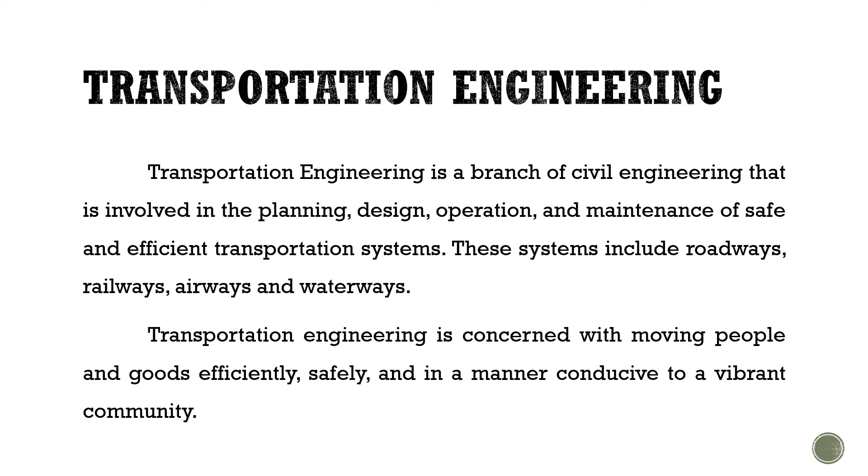Transportation engineering is also concerned with moving people and goods efficiently, safely, and in a manner conducive to a vibrant community. The importance of transportation in a country is comparable to the veins in the human body. Veins help the health of the human, and similarly, transportation keeps the health of a nation in good condition. Transportation also plays an important role in the economic, social, and commercial development of the country.

In order to properly execute things in the field of transportation engineering, we need an expert, called a transportation engineer. There are a lot of roles and responsibilities of a transportation engineer, but let me give you some. First, they could develop efficient transportation systems. They could also review the effect of urban development on traffic systems, and simulate traffic in an intersection to make sure the traffic movement is smooth.

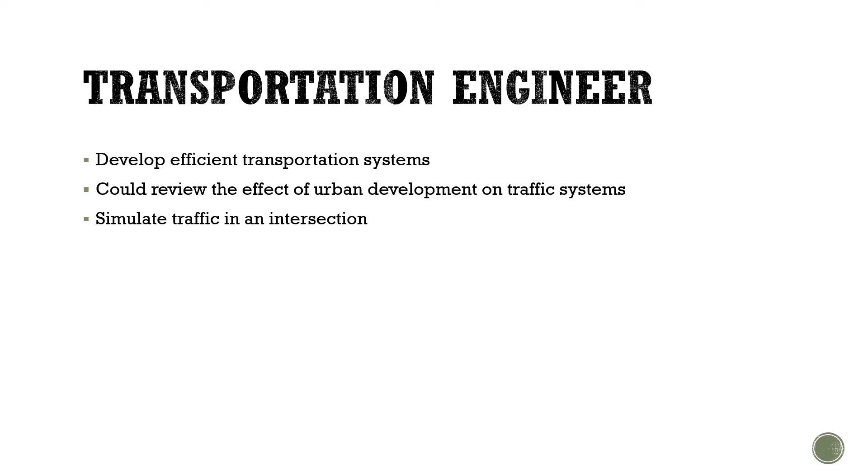Historical development of transportation. Before every other form of transportation, humans traveled on foot. Can you imagine walking from Batangas to Quezon City? According to history, the first known transportation was walking. Humans began walking upright 2 million years ago with the emergence of Homo erectus.

Fortunately, human beings learned to use animals such as donkeys, horses, and camels for transportation from 4000 BC to 3000 BC. In 3500 BC, the wheel was invented in Iraq, and the first wheel was made from wood. Initially, a canoe-like structure was used for water transportation, built by burning logs and digging out the burned wood.

When was the sailing boat invented? The first papyrus sailing boats are estimated to have been made around 4000 BC. The Egyptians developed many types of sailing boats. Some were specialized for fishing and traveling, while others were designed for carrying cargo or going to war.

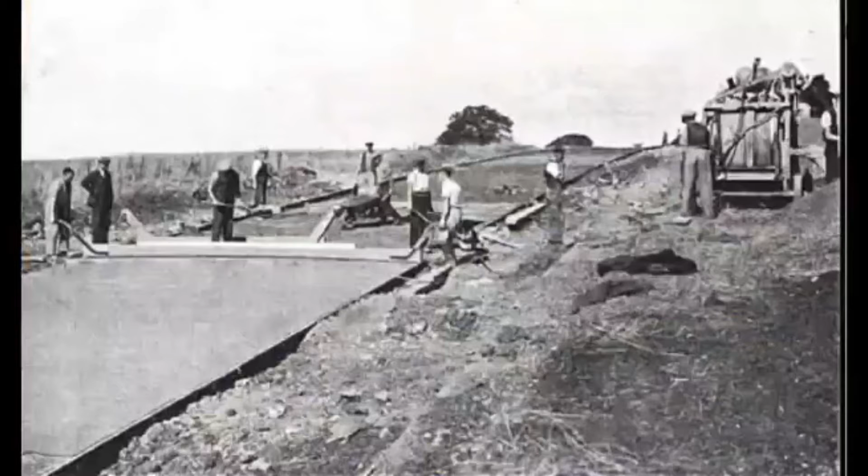Romans had a significant need for good roads to extend and maintain their empire, and developed Roman roads. Who designed the first modern highways? In the Industrial Revolution, John Loudon McAdam designed the first modern highways using an inexpensive paving material of soil and stone aggregate called macadam, and embanked roads a few feet higher than the surrounding terrain to cause water to drain away from the surface.

In the 18th and 19th century, many new modes of transportation were invented, such as bicycles, trains, motor cars, trucks, airplanes, and trams.

In 1886, the first car was developed with an internal combustion engine. Many types of transportation systems such as boats, trains, airplanes, and automobiles were based on the internal combustion engine.

The three leading automobile companies in the US in the 1920s were General Motors, Chrysler, and Ford. Furthermore, several styles of automobiles were produced, such as two-doors, small, large, sports cars, and luxury cars. Presently, the latest car models have integrated improvements in standardization, computer-aided systems, and platform sharing.

The modern railroad system uses remote control for traffic lights and movement of traffic, capable of speeds of more than 570 km per hour.

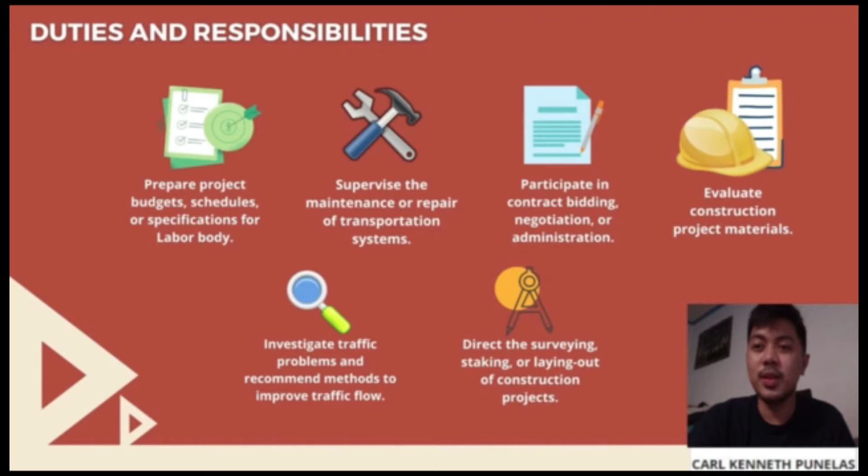Investigate traffic problems and recommend methods for traffic flows or safety. Analyze environmental impact for transportation projects. Review development plans to determine the potential traffic impact.

Evaluate traffic control devices or lighting systems to determine the need for modification or expansion. Prepare administrative, technical, or statistical reports on traffic operation matters such as accidents, safety measures, or pedestrian volume.

Develop or assist in the development of transportation related computer software or computer processes. Plan alteration or modification of existing transportation structures to improve safety.

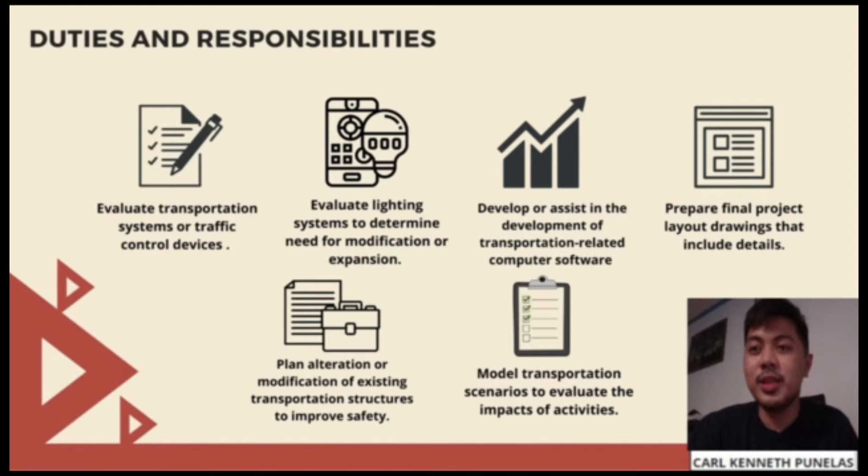Model transportation scenarios to evaluate the impact of activities such as new development, or to identify possible solutions to transportation problems. Check construction plans, design calculations, and cost estimations for completeness or accuracy to engineering standards or practices.

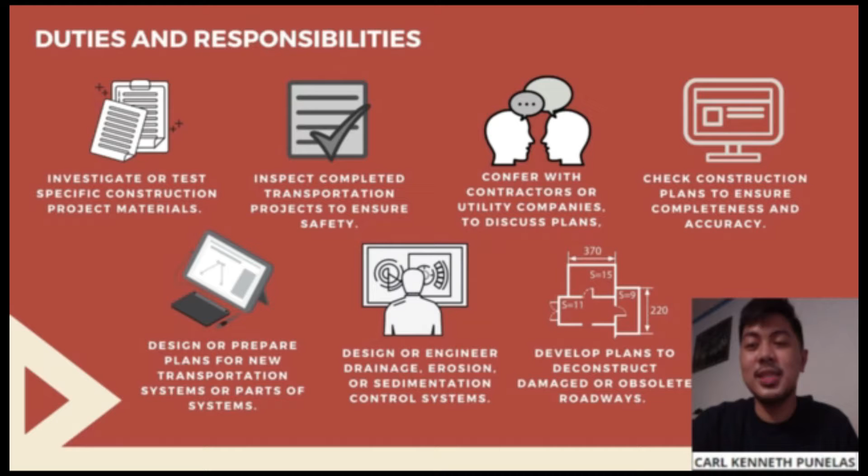Design or prepare plans for new transportation systems or parts of systems such as airports, commuter trains, highways, streets, and bridges.

Civil engineers help society by creating infrastructures that are necessary for modern civilization. As one of the main branches of civil engineering, transportation engineering helps society function and develop further by providing an efficient way of transporting goods and people.

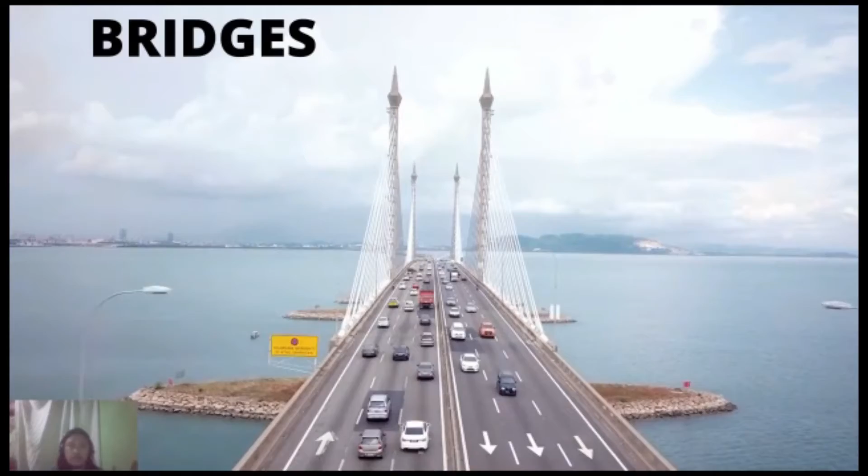Transportation engineers are responsible for the planning and designing of infrastructures related to transport networks, as well as the supervision of their construction and maintenance, such as roads, bridges, mass transits and railways, airports, ports, and harbors.

The objective of their work is to have an optimized traffic flow and improve mobility, while also considering safety, economic efficiency, and minimizing the harmful emissions of a transport network.

During the planning phase, engineers ensure the safe and efficient travel of a vehicle from point A to point B by identifying the best route and possible problems that may occur in the other phases of the project, as well as during the service of the infrastructure.

During the design phase, not only is the main infrastructure considered. Transportation engineers also analyze and evaluate traffic signals, traffic signs, as well as the condition of the environment where the infrastructure is to be constructed.

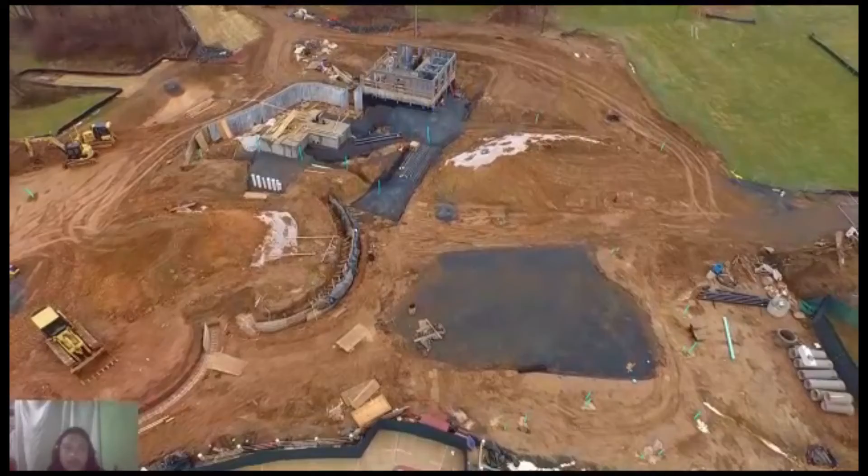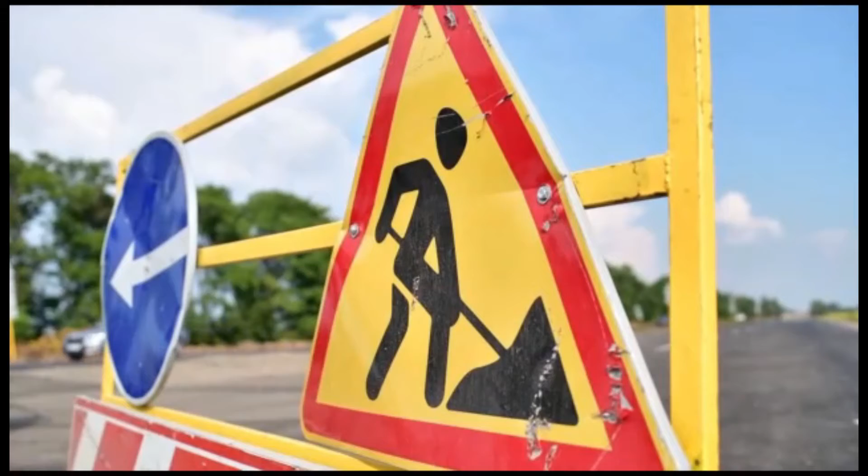Transport engineers work in offices and are also required to undertake site visits and community consultation. They may also be required to travel interstate or overseas for work, and may need to base themselves at the location of a major engineering site for the duration of the entire project.

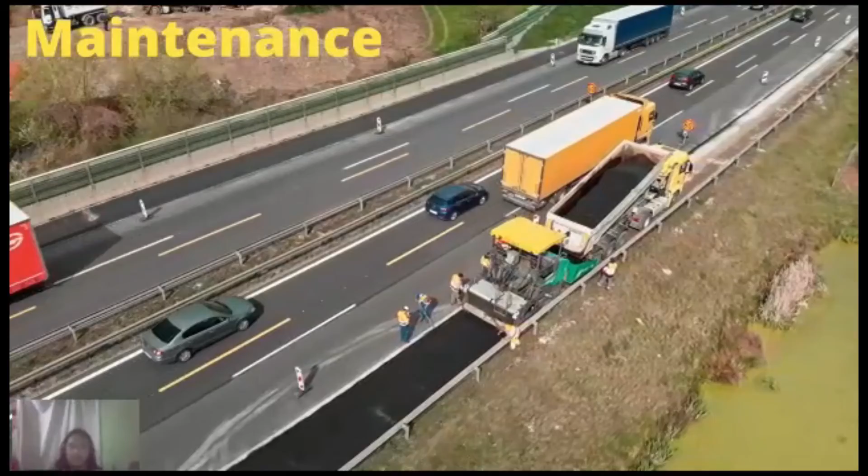Transport infrastructures are very essential for the mobility of people and the transport of goods, so maintenance works are needed for the continuous functionality of such structures. If the necessary maintenance measures are not carried out in time, this can lead to traffic restrictions on individual routes, or even to the failure of infrastructure elements, such as bridges.

Meet the famous Øresund Bridge in Copenhagen, Denmark. It is well known for its one-of-a-kind engineering feat of civil engineering. It is a combined railway and motorway bridge across the Øresund Strait between Copenhagen, Denmark and Malmö, Sweden.

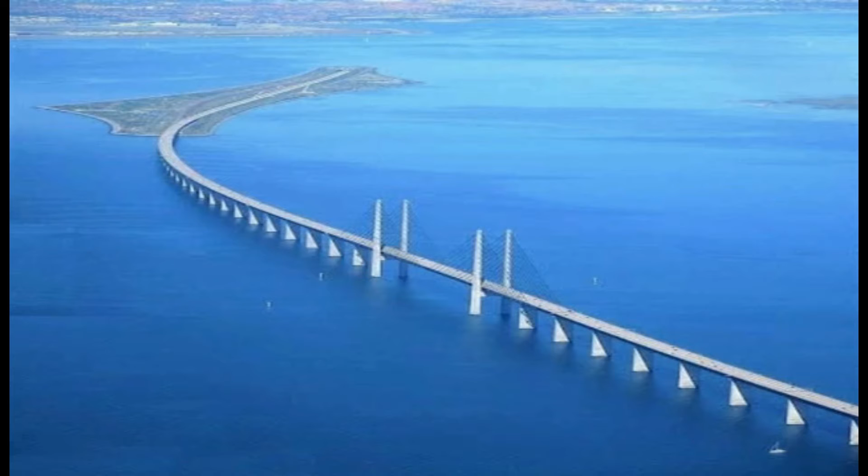This bridge is the longest combined road and rail bridge in Europe, running nearly 8 kilometers or 5 miles from the Swedish coast to the artificial island, or man-made island, known as Peberholm, that sits in the middle of the strait. The crossing is completed by the 4-kilometer, or 2.5 mile, Drogden Tunnel from Peberholm to the Danish island of Amager. The average crossing time of a car across the bridge itself can reach 10 minutes.

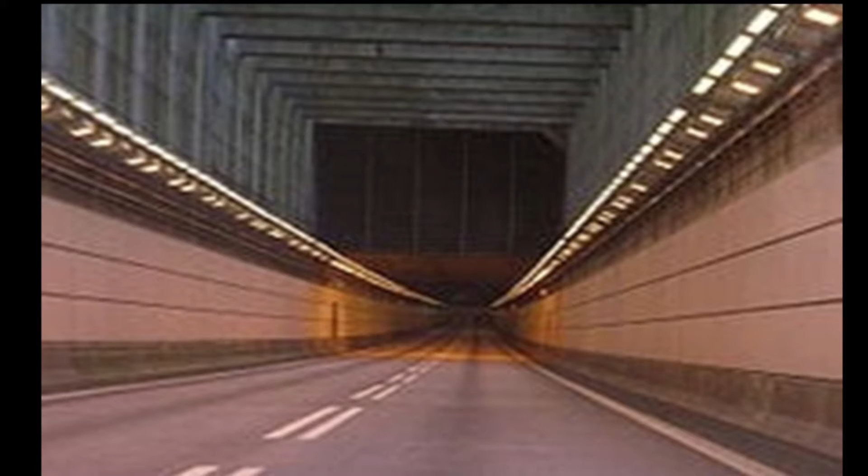Many have asked, is it legal to walk across this bridge? Unlike the famous Golden Gate Bridge in San Francisco, USA, it is illegal to walk across this bridge and even through the tunnel itself. Many have attempted to walk through it, but it delivered them straight to jail. In accordance with this, Danish police have arrested 4 individuals attempting to cross the Øresund by foot.

Why did Denmark and Sweden agree to this massive project? What gave them motivation? The primary motivation for construction of the bridge is to improve transport links in Northern Europe from Hamburg to Oslo, connecting the two largest cities of the region, which were both experiencing economic difficulties, and also improving communications to Kastrup Airport, the main flight transport hub in the region.

Construction started in the year 1995 and ended in the year 1999, followed by its opening to the public on July 1st of 2000.

Øresund's design is known as a cable-stayed bridge that is supported by 4 pylons, giving it the distinctive look of a handheld fan. The Øresund Bridge is one of the most complex feats of engineering, and some name it the Impossible Bridge Tunnel.

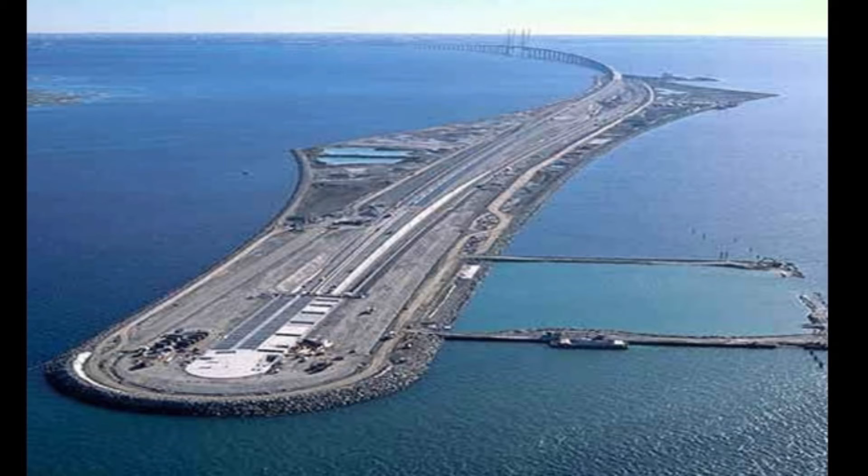One of the most famous transportation projects in railways is the Shinkansen.

The Shinkansen is also known as the bullet train, and it is a network of high-speed railway lines in Japan. Initially, it was built to connect distant Japanese regions with Tokyo, the capital, to aid economic growth and development. Beyond long-distance travel, some sections around the largest metropolitan areas are used as a commuter rail network. It is operated by 5 Japan Railways group of companies.

Over the Shinkansen's 50-plus year history, carrying over 10 billion passengers, there has never been a single passenger fatality or injury on board due to derailments or collisions.

Starting with the Tokaido Shinkansen, which was 515.4 kilometers back in 1964, the network has expanded to currently consist of 2,764.6 kilometers of lines with maximum speeds of 240 to 320 kilometers per hour, 283.5 kilometers of mini Shinkansen lines with a maximum speed of 130 kilometers per hour, and 10.3 kilometers of spur lines with Shinkansen services. The network presently links most major cities on the islands of Honshu and Kyushu and Hakodate on northern island of Hokkaido, with an extension to Sapporo under construction and scheduled to commence in March 2031.

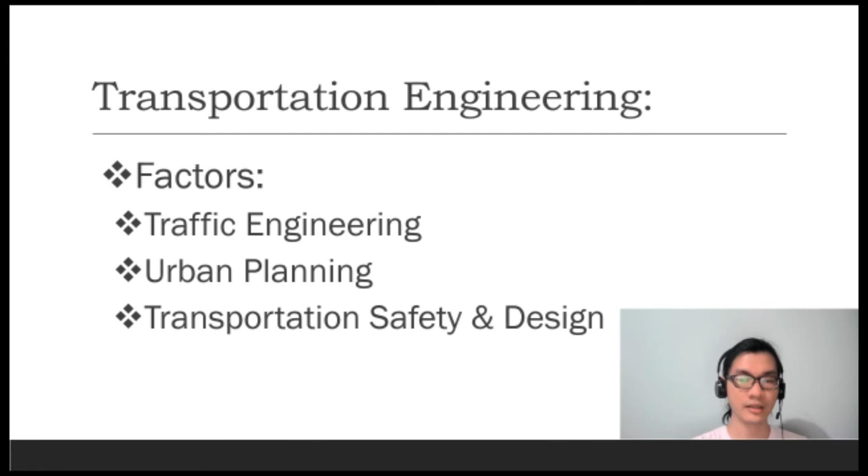Engineers play a critical role in identifying and recommending solutions to address safety performance of the transportation infrastructures. Some of their responsibilities may include managing and participating in the development and implementation of a statewide or regional road safety plan, collecting and managing crash data, analyzing crash data to identify safety issues and projects, utilizing analysis methods such as network screening and sharing the results, identifying safety projects and countermeasures, designing improvements, conducting before and after studies, managing roadway improvements, and coordinating safety issues with other statewide, regional, and local engineers.

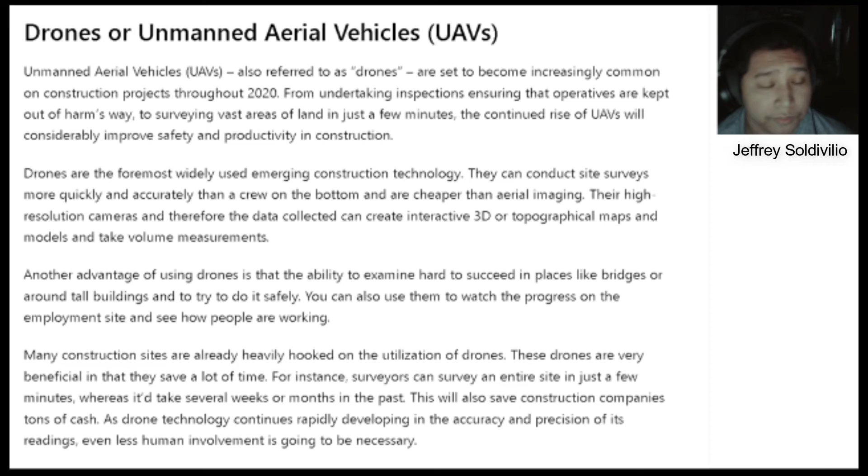Hi, my name is Jeffrey Soldivilio and I will be discussing an example of newer trends and innovations in the field of civil engineering. And one of those is drones, or UAVs, also known as unmanned aerial vehicles. So let's start.

Drones are set to become increasingly common on construction projects throughout 2020, from undertaking inspections, ensuring that operatives are kept out of harm's way, to surveying vast areas of lands in just a few minutes. The continued rise of UAVs will considerably improve safety and productivity in construction.

Drones are the foremost widely used emerging construction technology. They can conduct site surveys more quickly and accurately than a crew on the ground and are cheaper than aerial imaging. Their high resolution cameras mean that the data collected can create interactive 3D or topographical maps and models.

And take volume measurements. Another advantage of using drones is the ability to examine hard to access places like bridges or around tall buildings, and to do it safely. You can also use them to watch the progress on the construction site and see how people are working.

Many construction sites are already heavily reliant on the utilization of drones. These drones are very beneficial in that they save a lot of time. For instance, surveyors can survey an entire site in just a few minutes, whereas it took several weeks or months in the past.

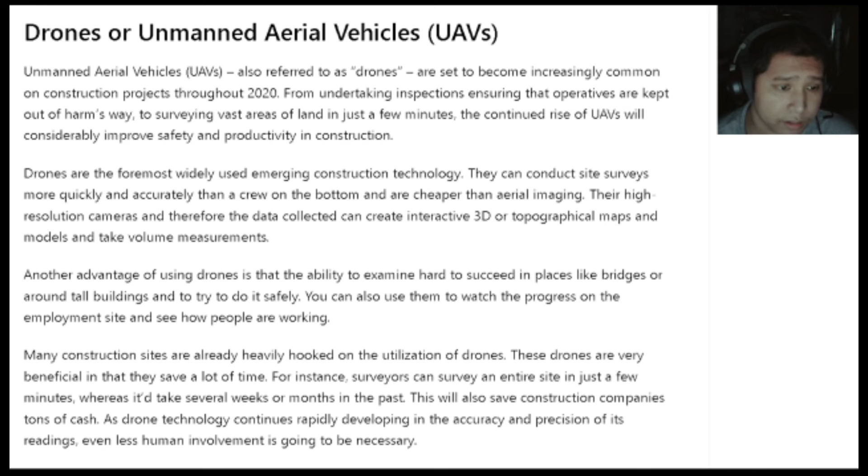This will also save construction companies tons of cash. As drone technology continues rapidly developing in the accuracy and precision of its readings, even less human involvement is going to be necessary. So that's an example of new innovations and trends in the civil engineering field.

First is integrated frictionless travel. Transportation planners see a growing need to make travel more seamless with minimal stoppages and checkpoints. This trend is manifesting in many ways, including mobility hubs that enable multimodal transportation, the rise of mobility as a service, platforms for ticketless travel, and innovation in micromobility and last mile connections.

Digital identity. Transit and transport agencies across the country are using digital technology to increase throughput, improve security, and help drive a better experience for users. This trend includes a move toward digital driver's licenses to enhance security, and experimentation with biometric and facial recognition to improve efficiency and throughput at airports.

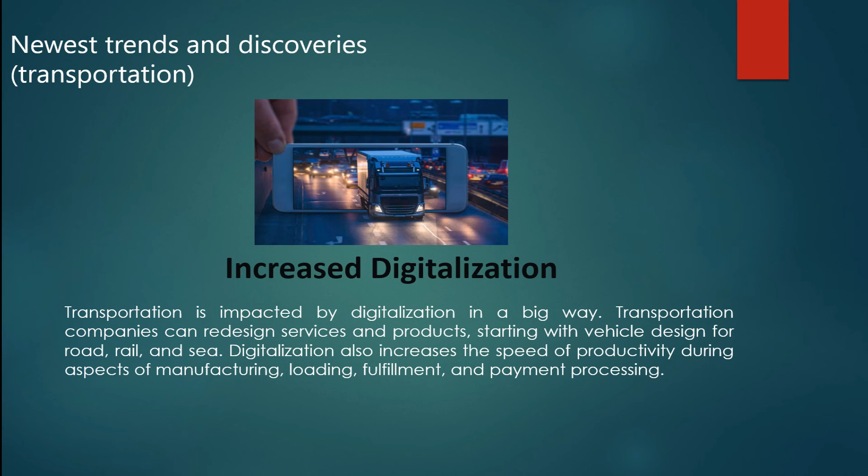Big data reliance, including the ability to analyze and systematically extract information, is a big part of the transportation industry. The automated data gained through this process pinpoints clear trends related to key aspects of their operations. In turn, this allows managers and decision makers to act with confidence and accuracy, particularly through machine learning. This can relate to anything from costing to logistics, supplier choice to manufacturing process.

Transport planners utilizing big data in a more prominent fashion will be positioned to make better decisions for themselves, their business, and the end user, regardless of which sector of the industry they are situated in. The data collected from road users, consumers, and others can be used to great effect, thus reducing inaccuracies and supporting sustained success.

Location intelligence. According to my research, location intelligence is technology that is growing in popularity across a host of industries. However, the transportation industries are perhaps the greatest beneficiary from a logistics perspective. The use of anonymous mobile location data collects pings from mobile devices and can be used for one-to-one interactions, creating a better user experience for road users while also spotting trends such as which modes of transport are used for roads.